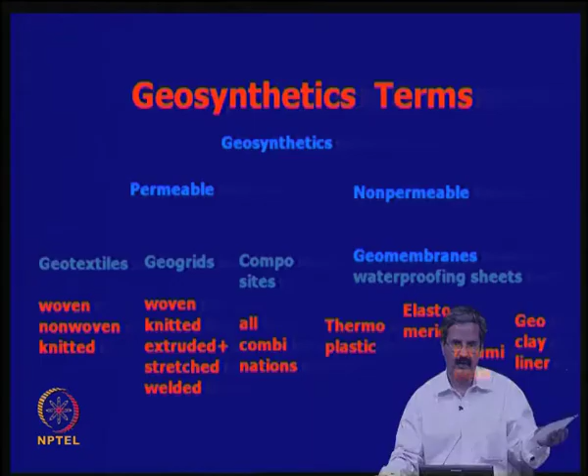So, you have some of these materials, and non-permeable means geomembranes. Actually, in the case of textiles, water permeation, or even permeation of any fluid, is possible. But geomembranes are impermeable, like this, where the permeability is very low, and they are from different families. One is called thermoplastic, the other one could be elastomeric, and sometimes we coat the materials with bitumen so that the permeability is quite low.

And we also have what is called a geosynthetic clay liner, in which you have a geotextile on either side and a bentonite powder mixture inside, and that also provides very low permeability compared to permeable textiles. This could be in the range of 10^-2, or this could be 10^-8, 10^-10 or 10^-14 centimeter per second. It could be very low here, whereas it could be very high there.

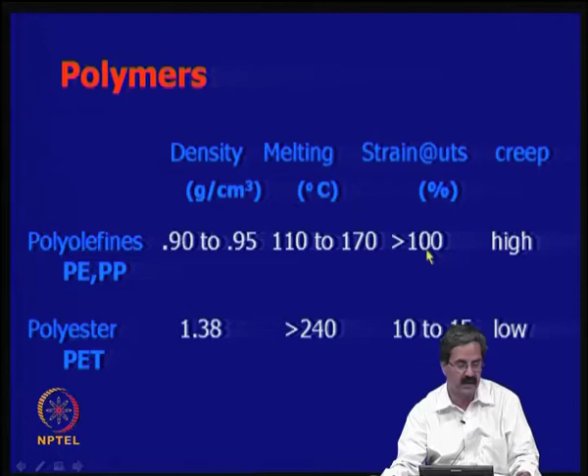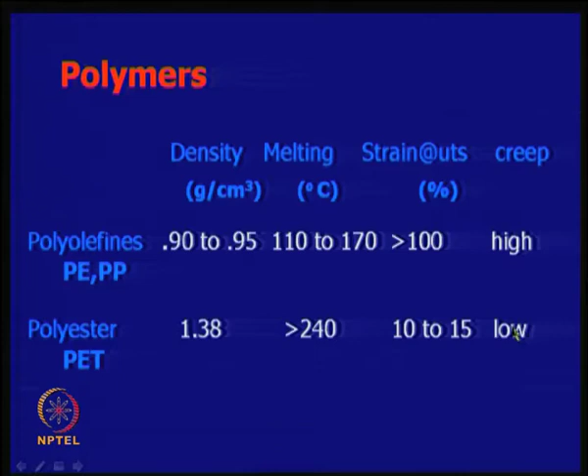The strain at ultimate tensile strength is higher because they are stretchable; for example, a geotextile can have a higher strain, and creep also could be higher. For some polyester materials the specific gravity or density is higher, the melting point is also higher, and you can get the tensile strength at 10 to 15%. For example, a stiffer material will reach the ultimate tensile strength very fast, and also the creep could be low. In some applications we do not want a lot of creep, so it is very important to choose the materials properly. So, one should ask what type of polymer you have in a particular geotextile.

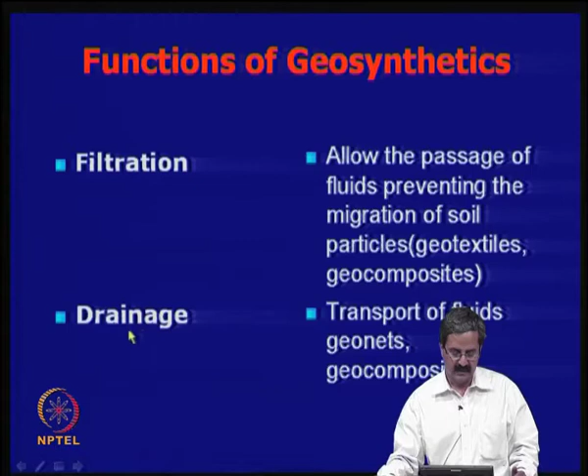Then functions, we have seen that a couple of functions are there, like, say for example, filtration: it only allows the passage of fluids, preventing the migration of soil particles. So you have geotextiles and geocomposites here. Then drainage, the transport of fluids; for example, this is a geonet composite.

Then for filtration just a geotextile or a geocomposite can be used, and separation is nothing but preventing the mixing of two different soils or materials using geotextiles or geocomposites. You can do this with any material which can be used for separation. Essentially geotextile is used because it is much cheaper and prevents the mixing of both materials.

Then you also have to protect, so protection layers are there. For example, in landfills you would like to avoid damage to a structure, a material or another geosynthetic. For example, if the geomembrane gets punctured, then it cannot provide the impermeability characteristic which is required from it.

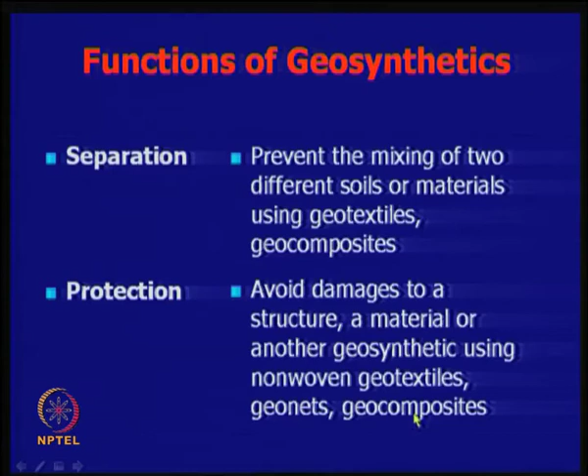So what you do is put some sort of cushioning material, a geotextile, which can be used to protect it, or you can put a layer of sand and again a layer of geotextile, because that is also useful. So it is useful to protect materials which could otherwise get damaged, for example any geocomposite. You can protect it by any means, particularly in landfills.

If some damage occurs in landfills or geosynthetic products, it is very difficult to repair them, in places like landfills where the geosynthetic materials are about 30 or 50 meters deep and the layers are already inside, and it is very difficult to remove or repair any of them. So we take utmost precaution by putting additional layers as protective measures.

Then, as I just said, the impermeable member is an important member of this family, particularly in the form of geomembranes. We would like to see that water is not allowed in some cases. For example, leachate percolating in the landfill should just go to a nearby leachate collection system and drain off. It should not go down and contaminate the groundwater.

So for the minimization of permeability, we use geomembranes. We say that either geocomposites or geomembranes are essentially fluid barriers. Then a very important thing is reinforcement of walls and slopes. It provides tensile forces in soil using geogrids and geotextiles.

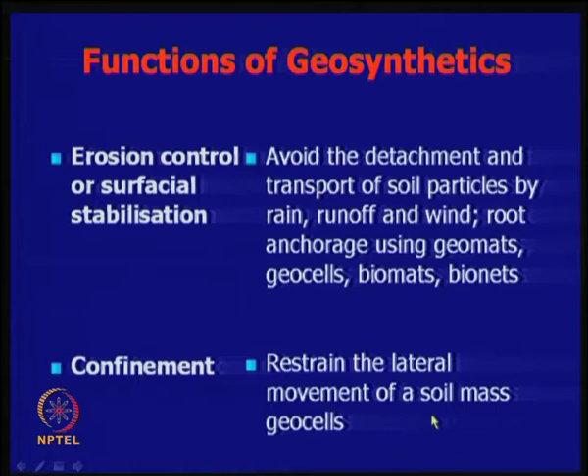Then another important thing is what is called confinement. The reinforcement also provides some sort of confinement. Nowadays you have geocells which are very good, which can provide good confinement. And actually the notation is like this: we have what is called the International Geosynthetics Society, in which they have identified a proper notation for each function. Say for example, you have a separation function, it will be like this. You have a material like this, this is a separation function, it acts as a separate layer.

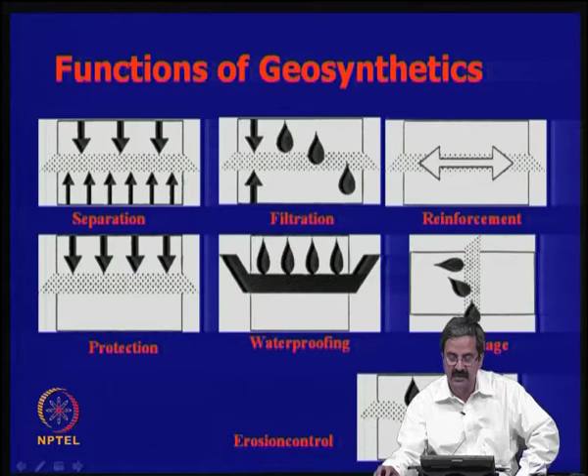Then filtration means it allows only water to go out of the material. Then this is reinforcement, like tension is applied in the reinforcement. Then this is a protection layer, it does not allow the bottom material to get damaged. Then waterproofing, like a geomembrane, it just collects water. Then drainage, you can see that the water particles go out of this. Say for example, you have a retaining wall, next to that you need to provide drainage. So, you have a nice system like that, the drainage is nicely allowed, and then the rainwater gets collected at the bottom of the retaining wall.

Then erosion control, as I just mentioned, this will just nicely collect all the water without the slope getting eroded. The slope should not get eroded, and if the slope gets eroded, then it is a serious stability issue. Normally the conventional solution is to provide a riprap, and the riprap, if you have a geotextile as well, prevents the erosion problem.

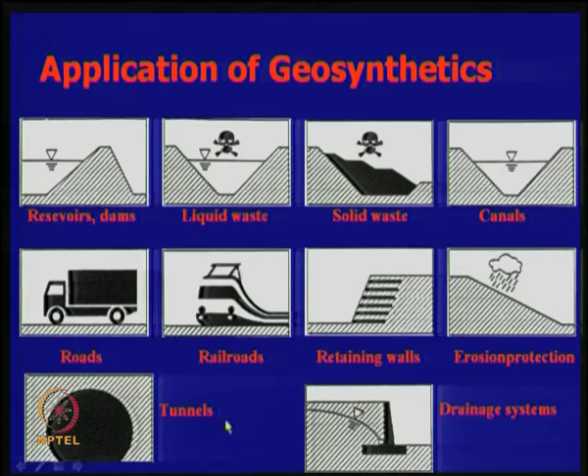Then the applications are too many, like it can be used in dams, reservoirs, liquid waste, solid waste, canal linings, then road network, railways, retaining walls, like as I just mentioned, you can have a retaining wall system with reinforced earth. Then erosion protection, even in tunnels it can be used as drainage systems also.

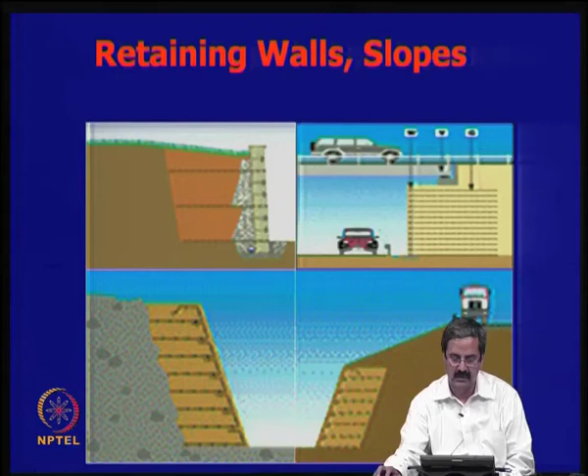Then this is a case of a reinforced slope, in which you can construct the slope to about 70 degrees, which is not otherwise possible by soils alone. You can see that this is another type of example, and this is also a reinforced slope. Then soil can be restored by reusing the same material.

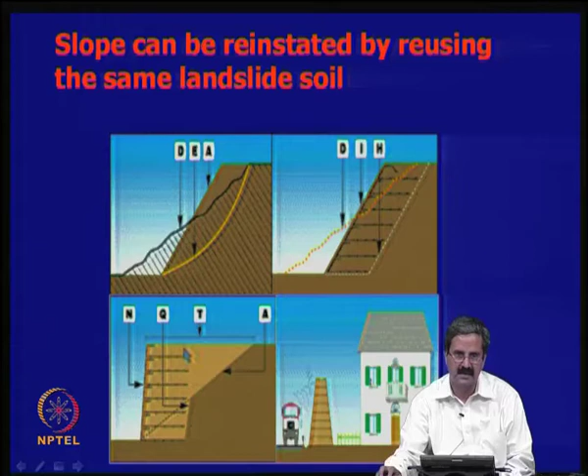This is about noise barriers. You have a residential locality here, and then you have a lot of noise nowadays coming from the highways. When the speeds are very high, like more than 150 kilometers per hour, it creates a lot of noise, so you have a noise barrier system designed here.

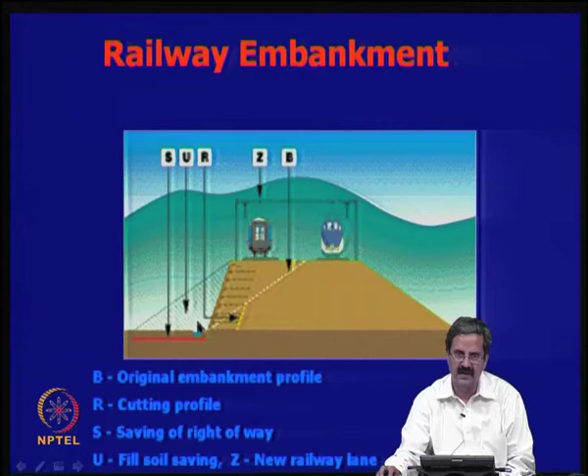This is another example where, in the case of railway embankments, the earthwork can be saved. If you are able to construct the slope using the RE wall, reinforced soil technique, you are able to save this much soil, and it is much more stable as well. You can design some of these things in a very comfortable way. In the highway embankments, you can see that the area of cross section that could be saved is significant.

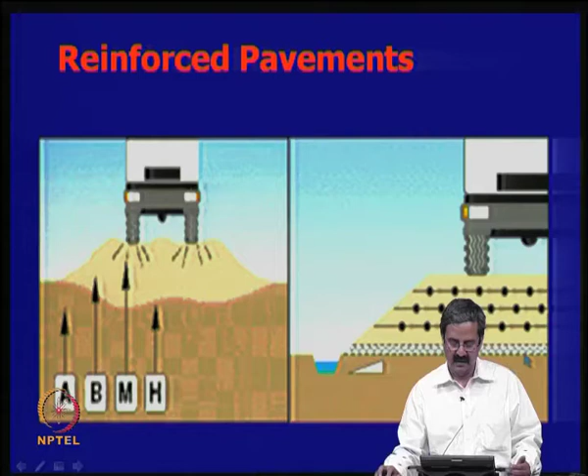In the case of pavements, as I was telling, it is possible to have rutting failures—meaning deformation failures—as well as fatigue failures, which are because of the repeated application of loads. You can see you have higher resistance with this geogrid material, and you also have drainage here with a geotextile. So all the problems that the road has, whether the subgrade is poor, the material is poor, or the loads are high, all could be handled by a proper combination of geogrids and geotextile.

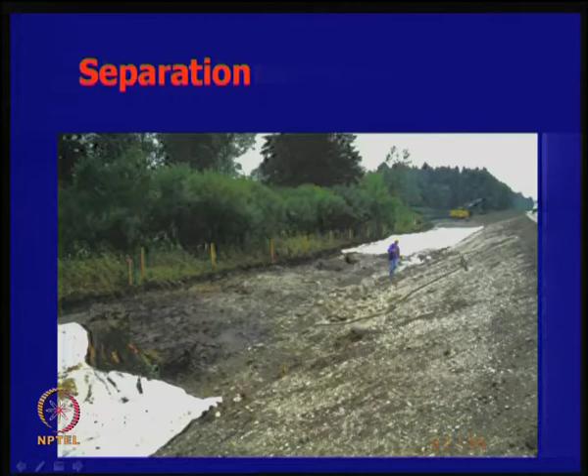This is some place where they are trying this separation function. As I just mentioned, it has been used quite extensively. You can also have separation plus reinforcement in some applications.

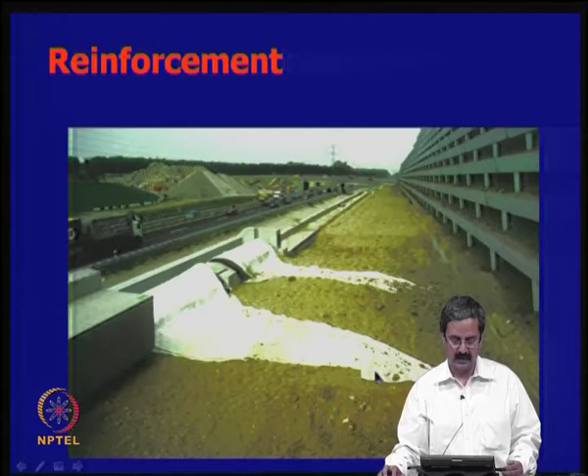This is how it looks like at the top, where you just take this material, filter cloth. This is a close view of that material, and this is the same view.

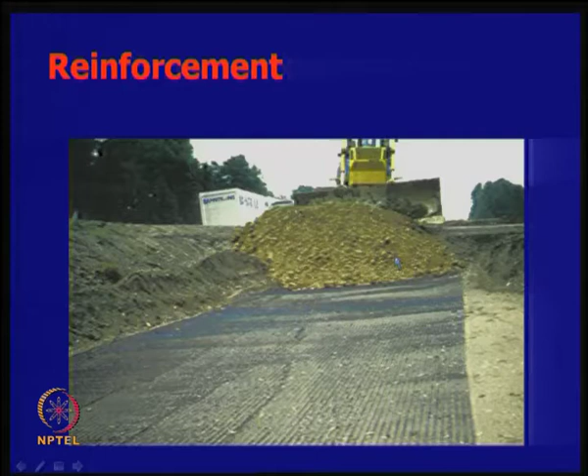Reinforcement in the case of roads can be done like this, where you have a granular subbase material, a subbase material, and then you properly cover it and put a geogrid like what you have here, and put the backfill soil or whatever subgrade or subbase material, and then roll that, and then you have very good properties.

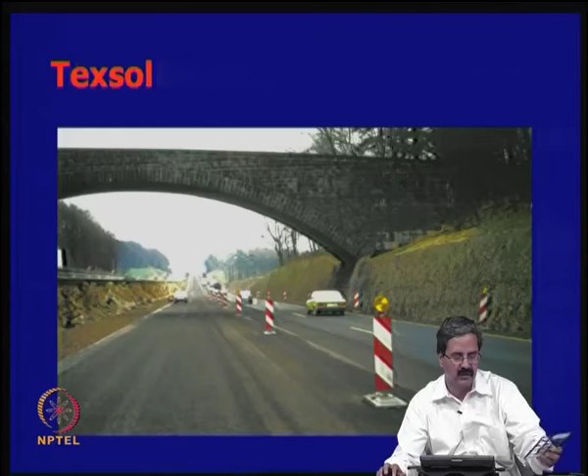So what we have is what we call reinforced soil, but in some places you can add fibers to the soil, and that also leads to cohesion. You can add a lot of waste materials to soils and they increase cohesion.

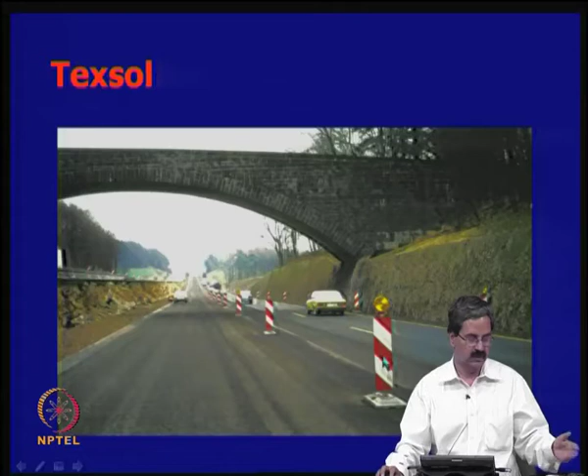This is a case called Texsol in France, where the wall was constructed with just this material alone, using a lot of it. Since it has good cohesion, it will not collapse, and it can retain a height of about 5 to 6 meters easily. That is much cheaper than going for other types of materials. Because of this, people have been exploring different methods of using fibers and reinforced soils.

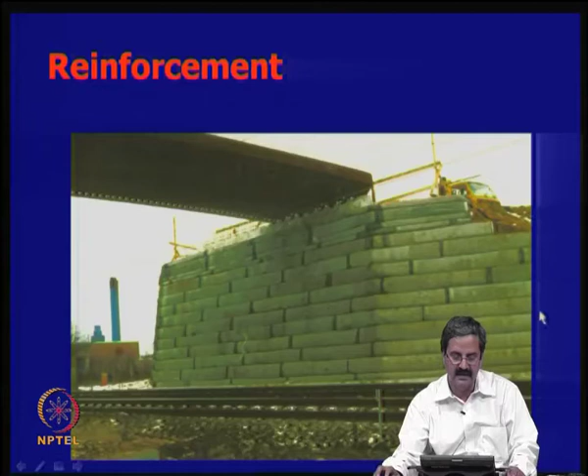This is an erosion control mat, where one can have a geotextile coir material and so on. You can see here that the slope is very nicely finished.

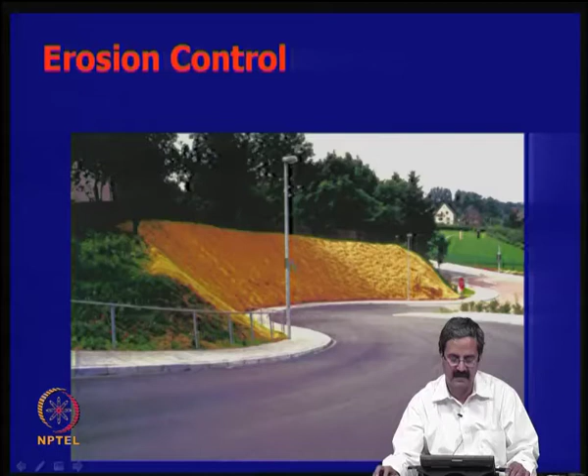Some more applications I would like to mention are hydraulic engineering applications. We covered some applications in the previous class. Waterproofing of dams is very important, along with waterproofing of canals, reservoir liners and floating covers, tunnel waterproofing and rehabilitation, and pipe rehabilitation.

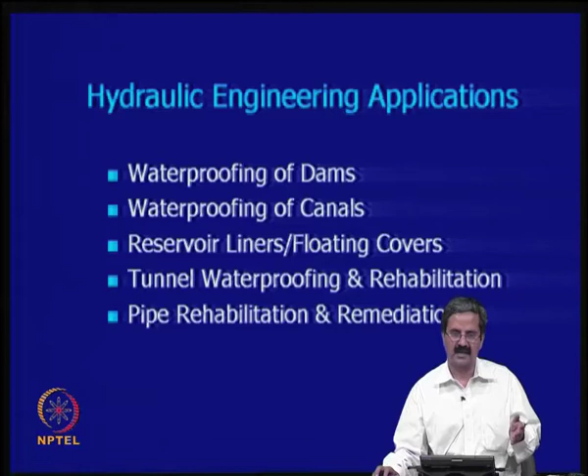In many of these applications we have different types - transportation applications just for roads alone, applications for landfills only, hydraulic applications, and even structural engineering applications, where as I just mentioned geomembranes can be used for waterproofing.

In the case of waterproofing, normally masonry, concrete and earth dams are used, and for these, if you want waterproofing, you need a good geomembrane. It's for waterproofing that we provide this, particularly for many dams which are old, say for example 50 years, which have a lot of leakage and sometimes excessive leakage. In fact even in India we have many dams with this leakage problem from the upstream side. What happens is you expect the dam to store water, but if there is seepage then it cannot store water properly - sometimes it can be even excessive leakage.

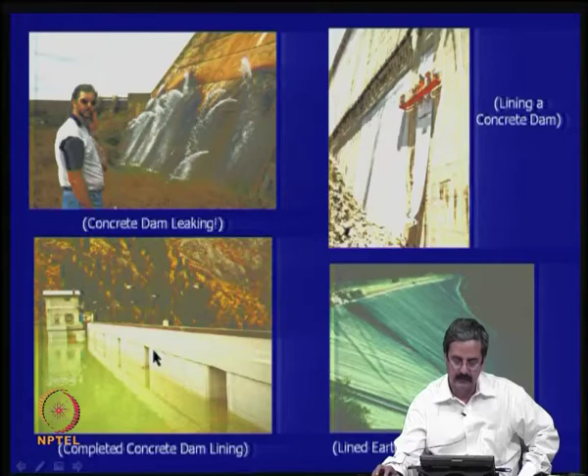This is another one, a lined earth dam. In some earth dams we provide riprap, so before the riprap you can provide a geomembrane to ensure there is no leakage.

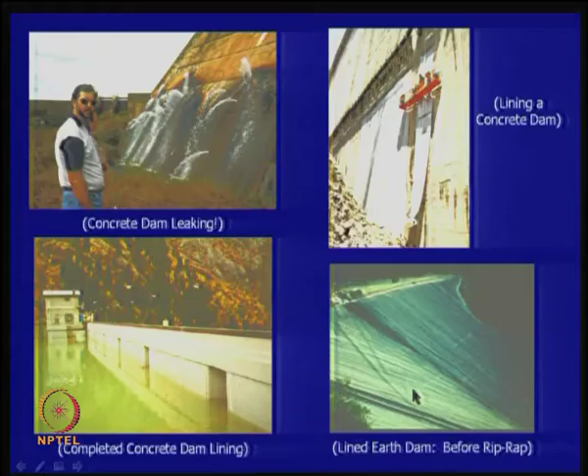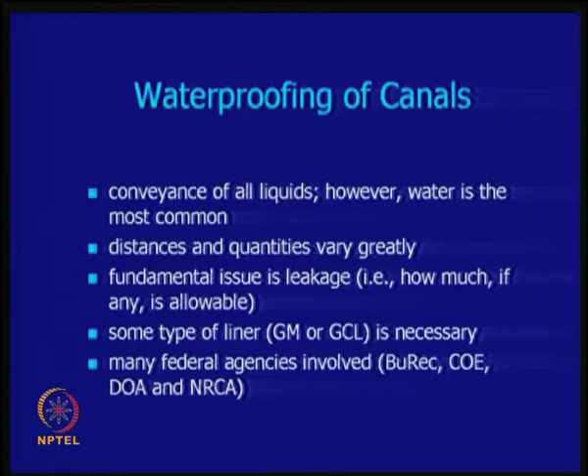Then waterproofing of canals - in many places in India, for water supply, irrigation, and drinking water, particularly irrigation canals carry large quantities of water, and if there is a problem of seepage it is very significant. For example, if 20 to 30% is lost through leakage, that is very risky. So we need some sort of liner, a geomembrane or a GCL, and there are many agencies even in India doing this.

It is even possible to line canals which already have a lot of water flow. People have methods of doing this lining.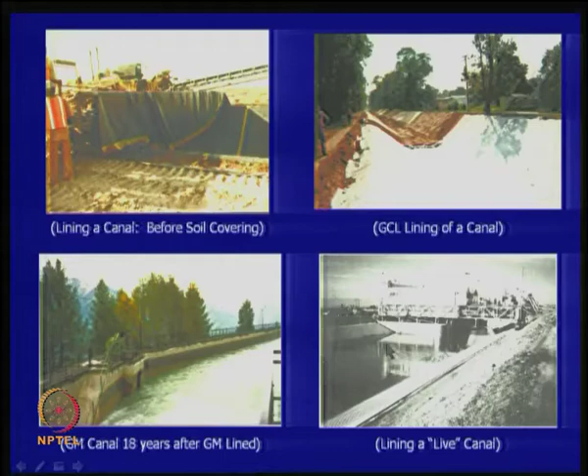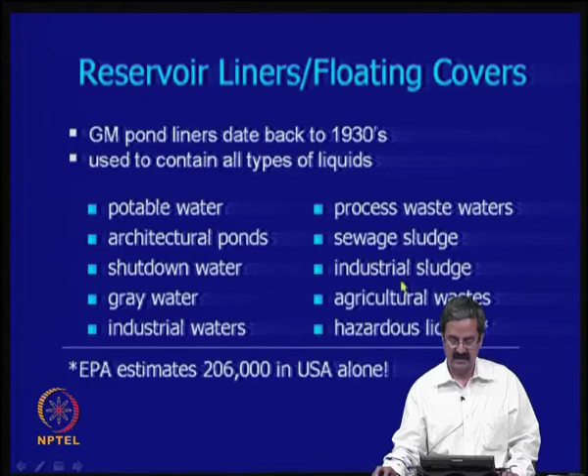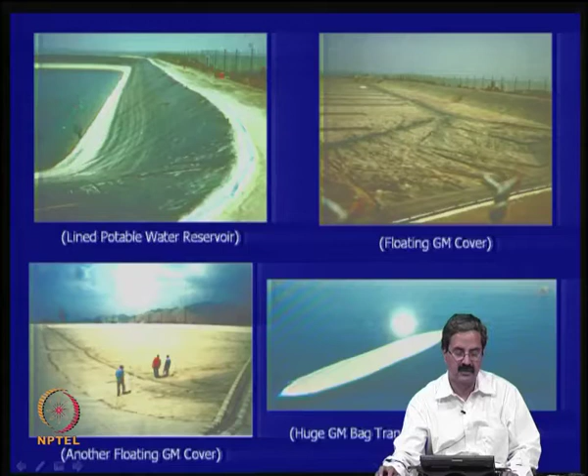Geomembrane lining is very essential. It has been useful for storing water in tanks and ponds, whatever waste water you have, sewage sludge, agricultural wastes, and hazardous liquids. The advantage here is handling issues like liquid depths and slopes. For example, if potable water is stored, it should not leak, so you need a geomembrane for that.

You should be very careful, as I mentioned earlier, because the friction between the soil and geomembrane could be very low. This can lead to floating, where because of the slightest pressure the membrane can get lifted up. So one should be careful, and that is the reason floating failures occur, like a floating GM cover.

The geomembrane should not get such formations. That is one important worry with geomembranes. They have been very effective, but if there are air gaps and such, it just gets lifted up and then there is a problem.

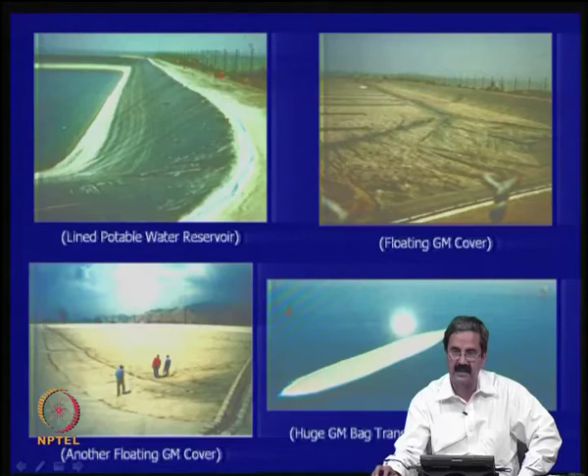Here too, this entire area is a geomembrane area, but in some places it became a huge GM bag transporting potable water. So this is one type.

There are many issues even in tunnels. For example, in the northeast and other places where they are trying to put railway lines through tunnels, a lot of leakage occurs in tunnels, and it is very difficult to handle. You are trying to construct the tunnel and then the water starts seeping in, which is very difficult to manage.

So what we do is set up a system: first you put some shotcrete, which is nothing but cement plus concrete, then a thick geotextile, then a geomembrane, then a permanent liner. This arrangement lets you collect all the seepage water through the geotextile and drains, and prevent that water from going onto the highway or, say, a train track.

So one can see that such problems can be avoided using these geomembranes.

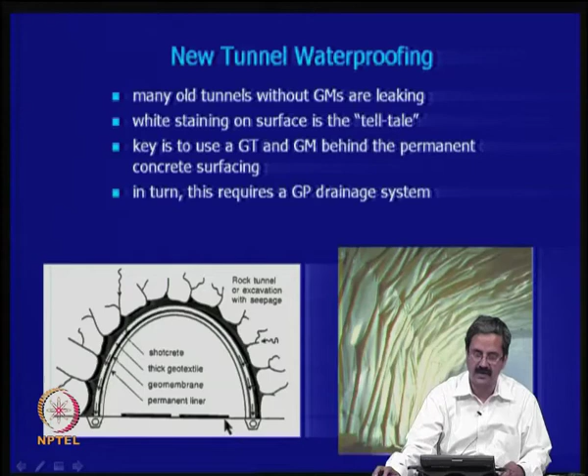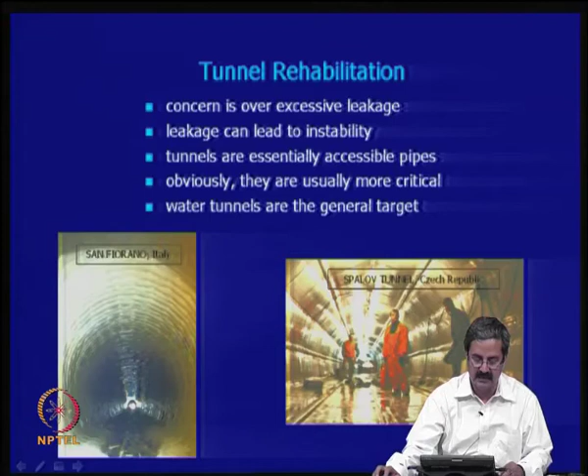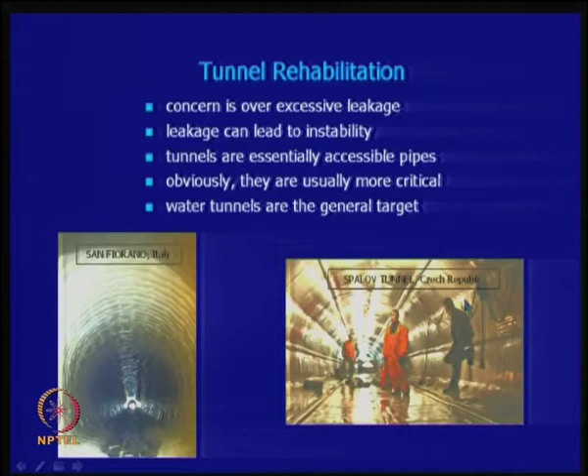Even in some places, tunnel rehabilitation is needed, for example where tunnels can't be used because of excessive leakage, which also leads to instability. In such typical cases, they try to put a layer of geomembrane with a systematic design, so these tunnels, whether for water supply or other purposes, can be rehabilitated.

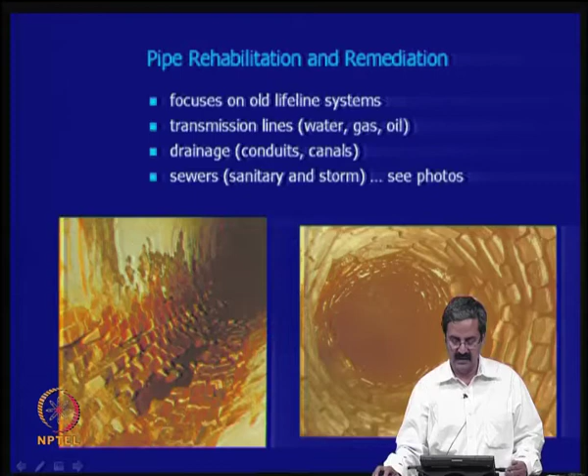This is another example: pipeline rehabilitation. In the olden days, people had cement pipes for carrying water, or pipes lined with bricks. If you expect these to carry water reliably, it is not possible, because water gets lost through seepage and the whole area gets damaged. So what we do is line them with coatings, slip liners, curing in place, and in-situ liners like pipe within pipe.

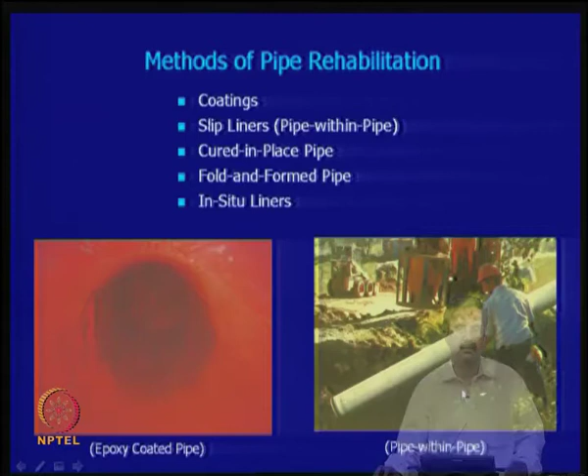There are so many techniques available, and now I would like to show how these materials like fibers and tapes are all made.

So, for example, you have a number of companies producing this plastic material. It is called polypropylene fibers, for example. In this case you have thin fibers in this material here, very thin fibers, like what I saw here. You can see that they are all very thin fibers.

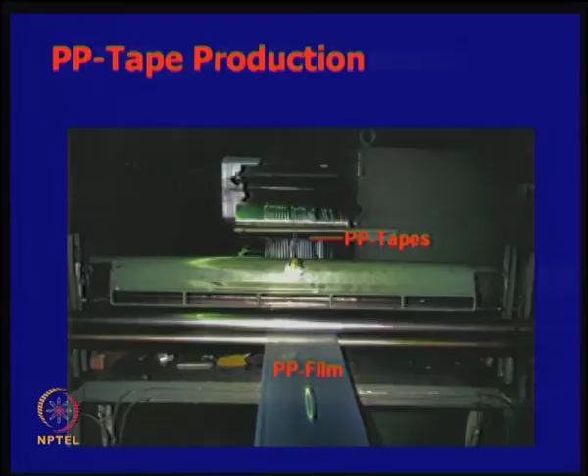So, this is about fibers. You can even have a material like a tape, a thicker material, which can be in the form of this, and whatever you have, either a geotextile or something, one can have one that goes through that. What you see in the black color comes a little later. So, you push the material and then it comes out like this.

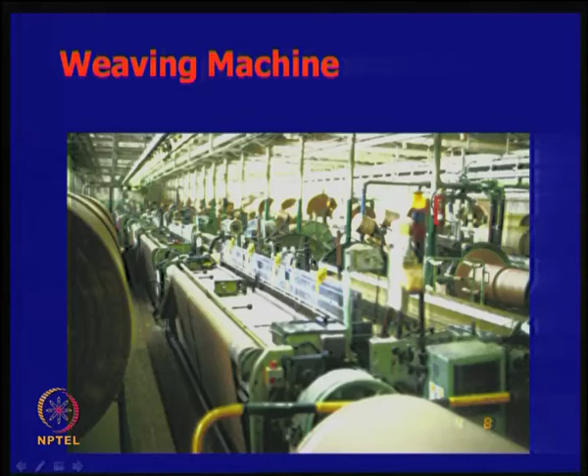Then you have, as I just mentioned, different types of weaving. For example, we are used to the weaving industry in India, where they weave sarees and other things. Here it is the same thing: weaving is done using machines, where all the fibers are stitched in a woven form. It could be single filament weaving or multifilament weaving. You can see that it is a big one.

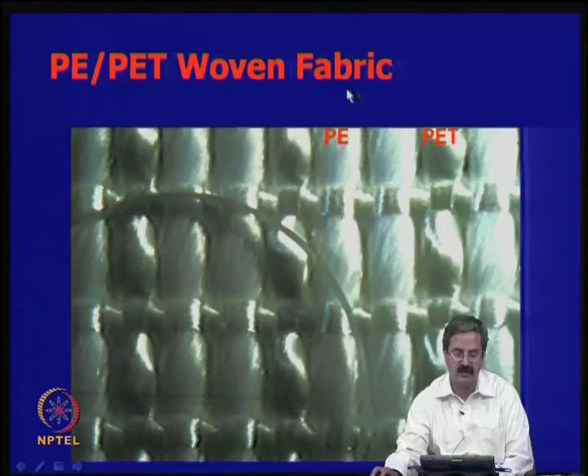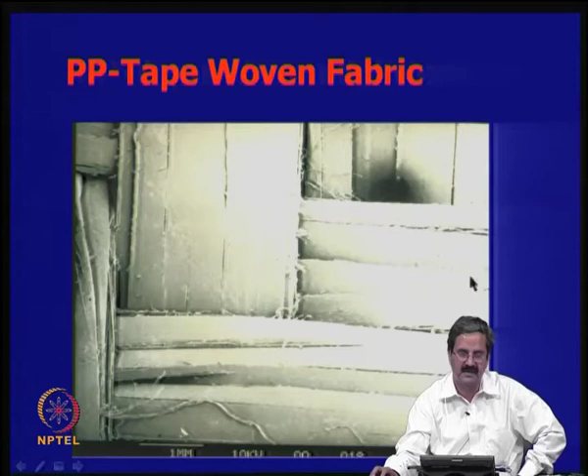Okay. Then this is again polyethylene, again a woven fabric here, you can see that. Again one more type. You need a very micro-level examination; only then is it possible. You do not see some of these arrangements with the naked eye. You have to look very carefully using a microscope, and you will be able to see these differences in indentations. This is again one more type. This is monofilament, all single filaments woven together. So, that is about geotextiles.

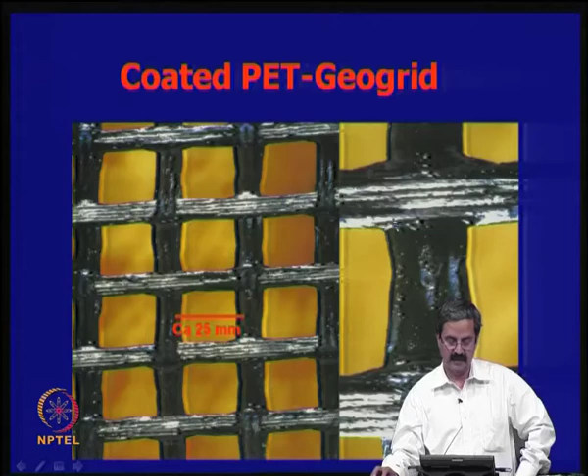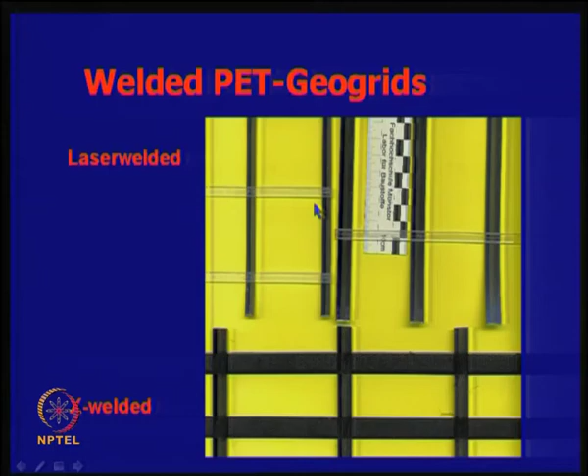Geogrids, like this is one type. These are laser welded, it could be like this. The welding technology has improved so much. You have X-welded ones. The advantage of the geogrid is that in the case of a geotextile, when earthquake forces or any lateral forces act, the resisting force is only because of the friction between the geotextile and the soil.

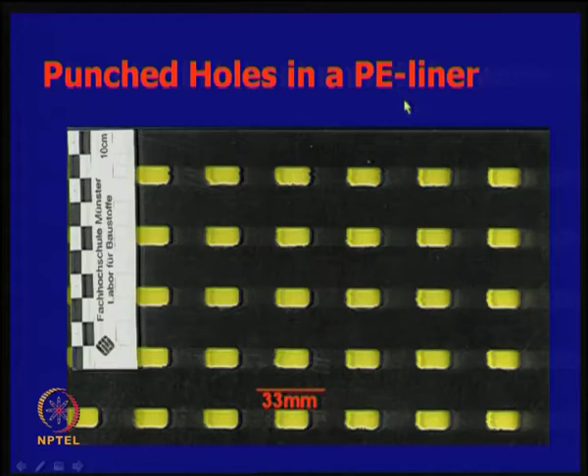But in the case of a geogrid, there is a small extra thicker part here that provides a bearing resistance. So, a number of materials provide a bearing resistance in addition to skin friction or frictional resistance, and this is much more efficient. One can punch holes in the member to get this done. In the case of grids, you have uniaxial members, and this is useful for RE wall applications.

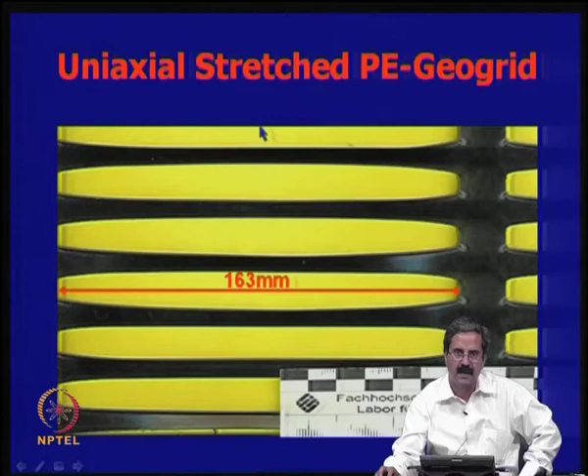Actually, for some of these slides I must thank my friends from Germany, like Landesgewerbeanstalt Bayern, who supplied some of these photos and material. Dr. Gartung and Dr. Helmut Zanzinger have a lot of equipment and experimental facilities. They have done excellent work in geosynthetics, and I was in their organization for one year in Germany. I collected a lot of information there, and now I am using some of this material in these lectures.

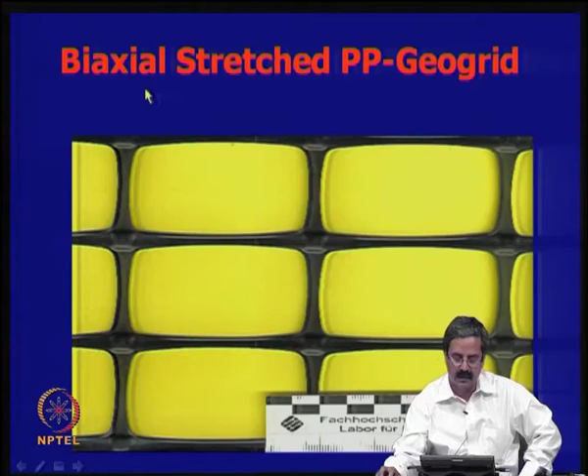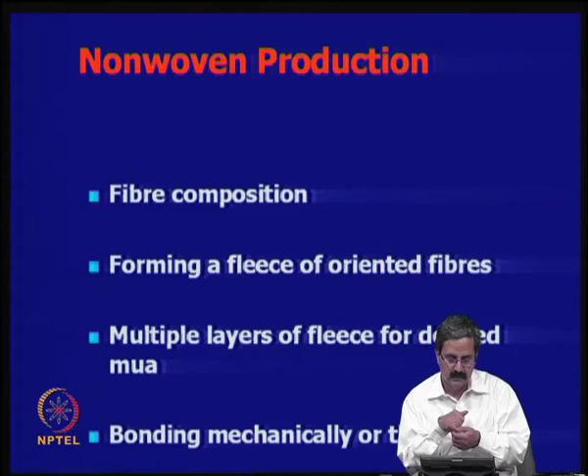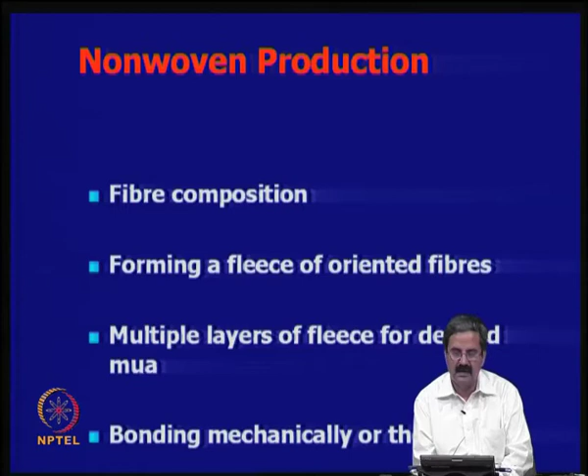This mass per unit area is an important property in the case of nonwovens. For example, paper is said to be 80 GSM, 80 grams per square meter, or a silk saree about 200 GSM. It denotes the quality of the material; if you have a very good density of paper or cloth material, it shows that it could be much stronger, more durable and all that.

So, here also we try to characterize some of these nonwovens using this term called MUA, which is nothing but mass per unit area. We measure it also. So, what we do is that we bond them mechanically or thermally; either heat or mechanical bonding is done to get a product. So, these materials are stacked in one place.

In fact, I visited one of the plants in Luxembourg, it is called the DuPont plant, in which a lot of geogrids and geosynthetics are all manufactured. So, these are all some materials that are stacked here.

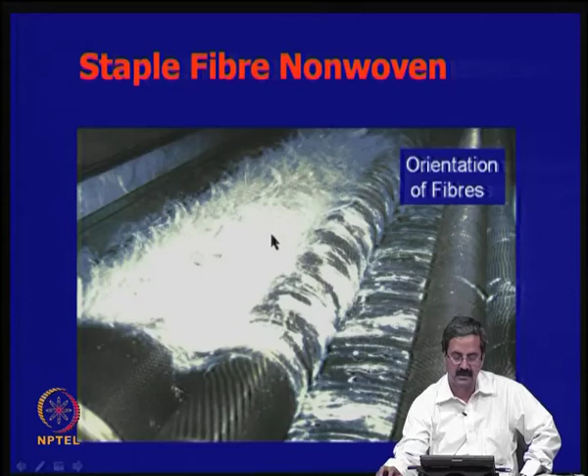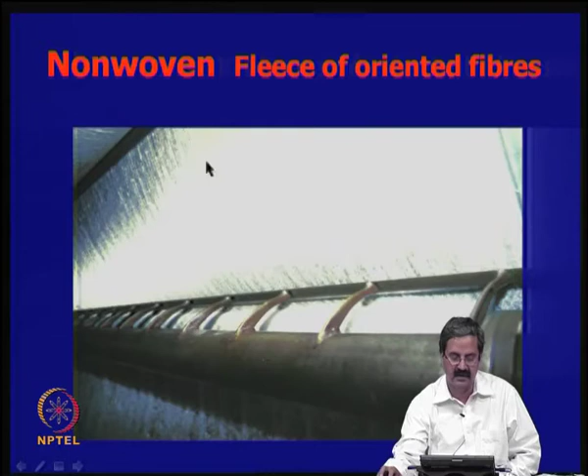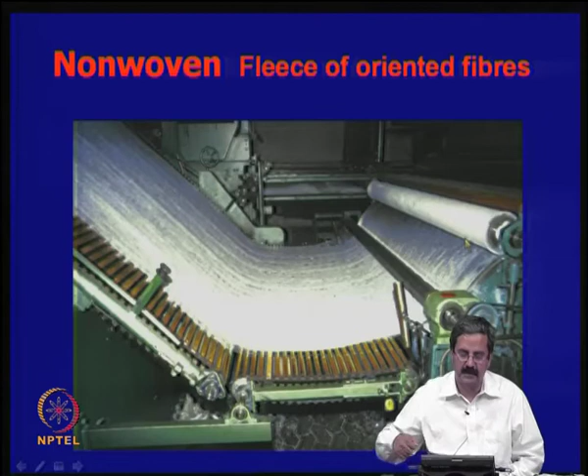You can see staple fiber nonwovens; orientation of fibers is something that they are doing here, some processing is being done. Then fleece of oriented fibers, like when you rotate at these high speeds, and then stitch it and join them together, they have a material like this which is formed. Then this is all like this, then it becomes like this. Remember that they are all plastics, polymer compounds.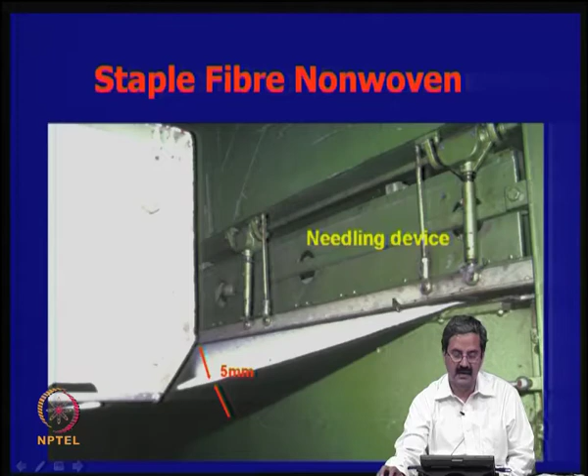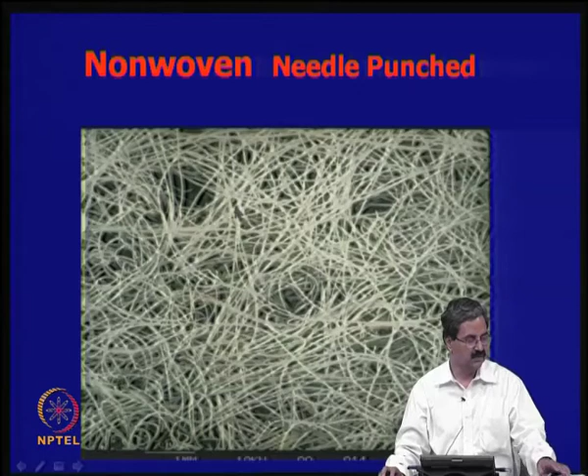Then there are a lot of conveyor belts, and a lot of mechanical processing is done, and sometimes a needling device is also there; this is the needling device. So, needle punched nonwovens, this is another technique that we use, and at a very close, micro level examination, you will see things like this. But in the gross sense, I do not have it here, yeah, I think this one.

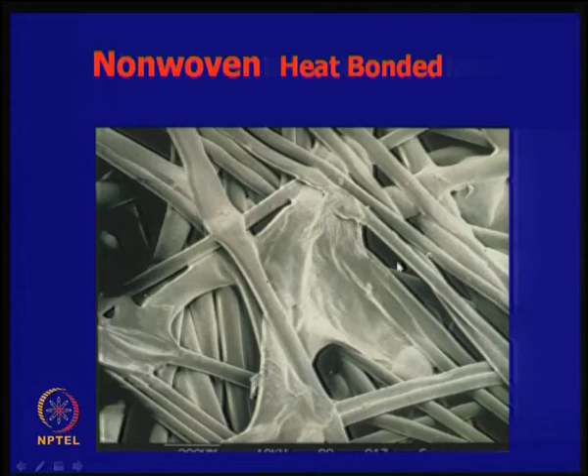So, we have some material which are nonwovens plus heat bonded. If you look at the micro level, the possibility is that it looks like this. Again, one more close view of the same thing. Then you also have extruded mats, like a random drain core.

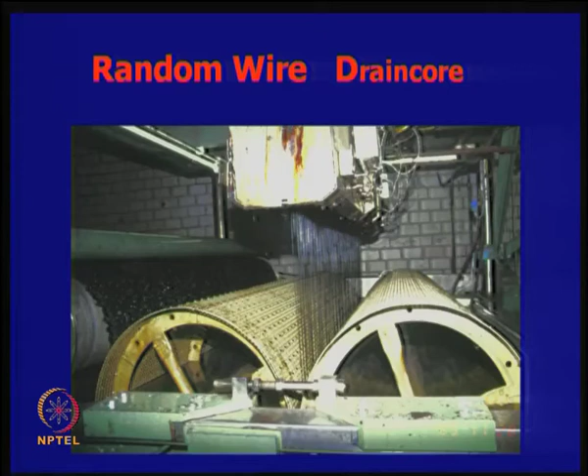So, for example, as I just mentioned, for prefabricated vertical drains we need to have a drainage core, and we have a geotextile as well as a geo filter. So, this is a drain core; you can see that we have a drain core here at the center. Okay. So, on either side you have a geotextile, and some of this material also can be manufactured in this manner.

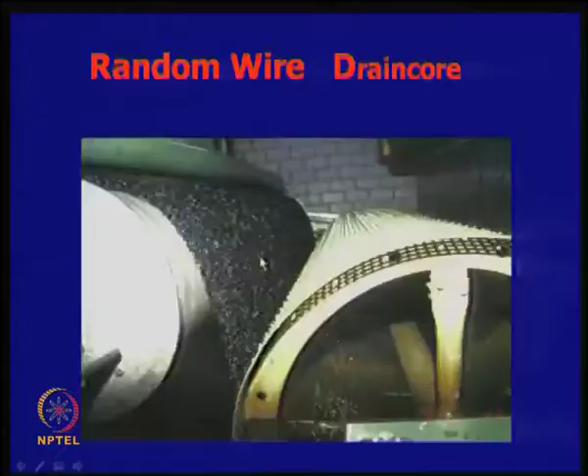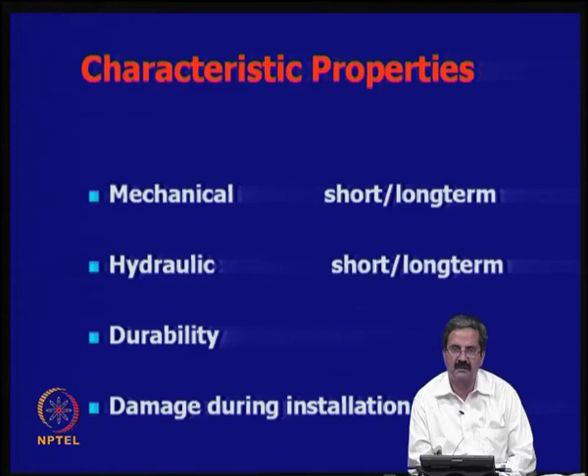Some important characteristics one should remember: you need to have some understanding of mechanical properties. Mechanical properties means strength and stiffness. Strength is nothing but, as I just mentioned, the ultimate tensile strength. Say for example, you take this material and test it, you have its short term tensile strength, immediately after the material is manufactured and ready for delivery and testing. So, you have a mechanical short term test where you get its ultimate tensile strength and also stiffness.

There are so many mechanical properties, and we will see some of them in a detailed way. Apart from strength and stiffness, there are other properties like the apparent opening size of the geotextile. The geotextile allows water, but how do you characterize its opening size? It is called apparent opening size, and that comes under hydraulic properties.

So, there is also short term and long term. For many of these materials we need to understand that there are two considerations: short term stability and long term stability. It should work immediately as soon as you apply it, and also in the long term. So, if you are using it for 10, 20 or 30 years, the mechanical properties should be very good. For example, I am using a geogrid in a particular application and the design life is 30 years.

So, I should know what its tensile strength is at the end of 30 years. We have some methods to calculate, if you know the tensile strength now, what its tensile strength should be after 30 years, based on testing, like durability studies or long term testing that people have done.

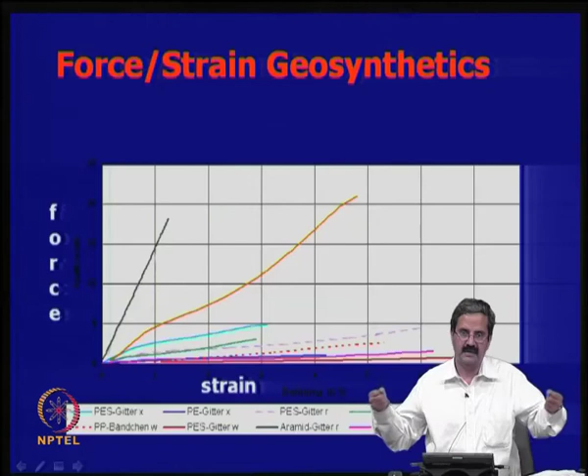This is a typical example. As I just mentioned, many of these materials have time-dependent response. Of course the x axis is not very clear, and the y axis is the force. Some can be very stiff, some can go to long strains in tension. Some materials reach the ultimate value in a short span, very fast, whereas in some materials it can take time.

It is a very interesting thing that depending on the type of application you can use both types of products. For example, I have one case where holding stones is an important criterion. If I put a geotextile, it should hold a stone, for example riprap placed on a geotextile.

Okay, geotextile is there, and then that material can really sag. I do not have any problem if this geotextile can expand. Why? Because it should not get punctured, it should not yield, that is the only thing. It can deform a little, it is not an important criterion, but as long as it does not crack and holds the stone pitching or pebbles, it is alright for me.

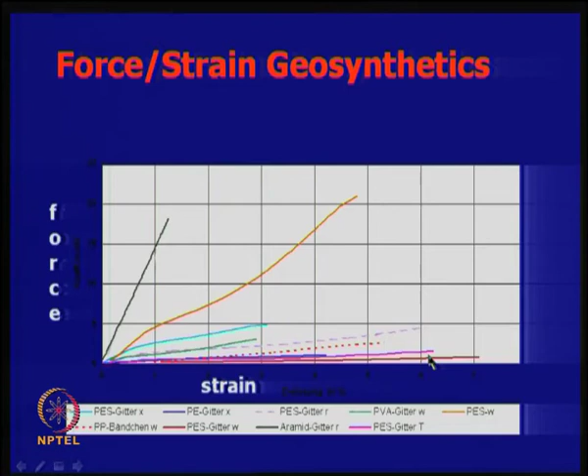But in some other applications it should be very stiff also. Stiffness is shown by steeper stress-strain curves or force versus strain curves, and if it is flat, it is also okay, because the materials that are stiffer are a little expensive compared to the ones that have lesser stiffness, because of the manufacturing process and all that. So these are all some properties.

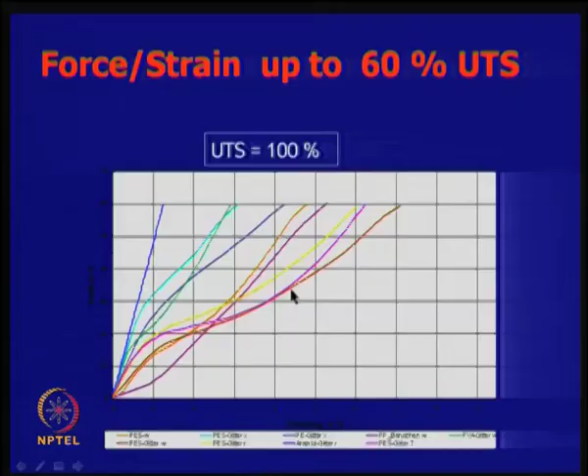Ultimate tensile strength, again, can have a relationship like this. What I want to say is that the geosynthetic family of materials has a number of supporting organizations. The Indian and International Geosynthetic Society is one, and then we have many publications and journals in this area. For example, Geotextiles and Geomembranes is one, Geosynthetics International is one, and it has been quite extensively used in many ground improvement problems.

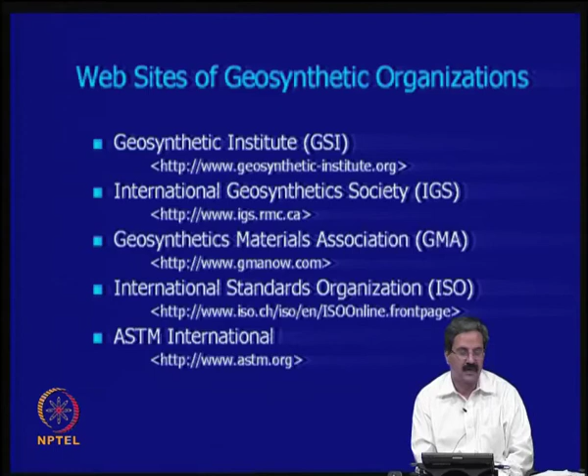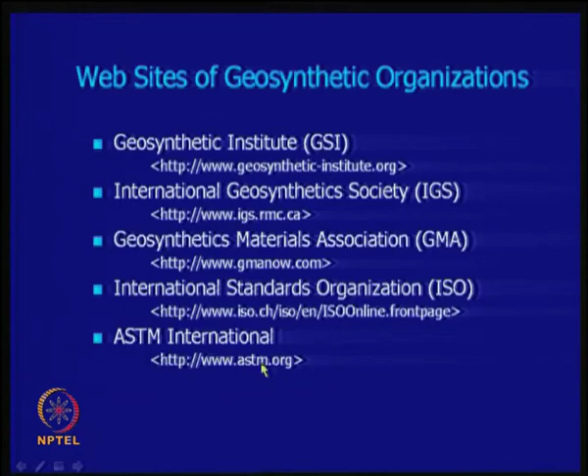As I mentioned, the Geosynthetic Institute is one, International Geosynthetic Society, then Geosynthetics Materials Association, International Standards Organization like ISO standards, then ASTM International. There are many standards nowadays, because these materials all have testing standards. In America the ASTM standards are popular, and in Europe they have EN standards. ISO standards are also there for geosynthetics.

You also have various guidelines developed and proposed by these institutes, like the International Geosynthetic Society, quite useful in many applications. If you do not use this material properly, it is useless. To use this product properly, you should know its technique and its properties. To have its properties, you need standards, and to see that they are properly implemented, you need technical guidelines.

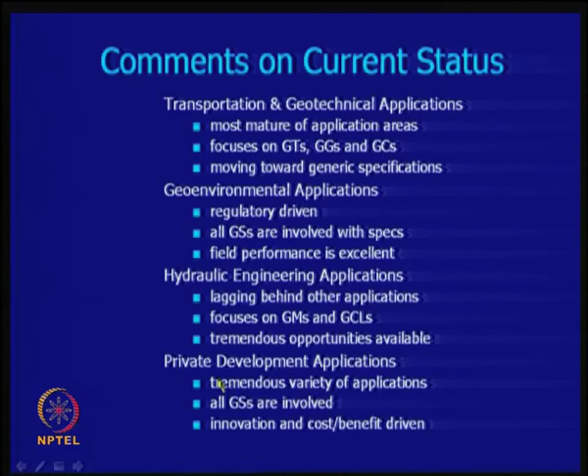In fact, I know many apartment complexes using geomembranes; suppose they have a swimming pool in their development area, they need to go for geomembrane, they may go for geogrid. So, apart from the work in the public sector, there is so much encouragement and application in the private areas also. What I want to say is that geosynthetics are bona fide engineering materials and must be treated as such. Testing methods and designs are available; you should understand them properly and design them properly.

The basic advantage of geosynthetic materials is that they are all quality controlled products; each product has an ISO certificate, which is not easy to get, and once you use them in the field, you can test the samples also. So, they are all supported by rigorous quality control programs. The field performance has been excellent.

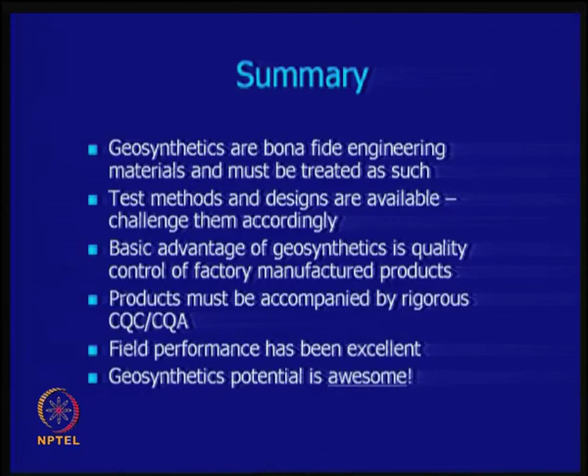In fact, RE walls have been constructed for about 30-40 years now. The first RE wall, constructed maybe 25 years back, is doing well. Geomembranes, in fact, Terzaghi used in 1958 in one of the dam projects, for more than 50 years. So, their performance has been excellent. There are so many applications that imagination is the only limit here.

If you are really serious about using these materials, you have to be a little more aggressive in thinking and take advantage of these products. Your challenge is to take advantage of these materials: number one, the design has to be very good, then in the analysis you must be doubly sure that it works for you, provided you install it properly. So, one should take advantage of this, and of course, people have been doing it. I am sure that in the subsequent classes we will be dealing with some of these materials and their applications. Thank you.